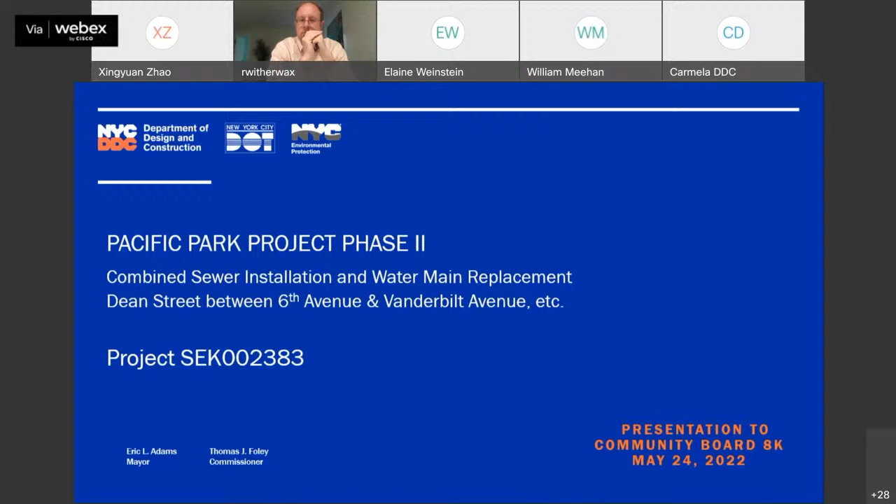So this is a presentation on the Pacific Park Project Phase 2, Project SEK002383, on Dean Street between 6th Avenue and Vanderbilt Avenue and some other avenues which we'll get to. It's the combined sewer installation and water main replacement project. So this is just the agenda.

We have not yet issued a notice to proceed to a contractor because we haven't engaged a contractor just yet; we're still moving into that process. The project is to start this fall 2022, and once we have more details we will share those with the community. It's expected to take 36 months, and once we have the contractor name we will share that. The total cost of the project is $15 million.

DEP prioritized this project to provide residents living in the newly constructed buildings with sufficient capacity for sanitary discharge and to convey stormwater from the project area. It's also to upgrade the water main sizes to provide for additional peak demands and to improve fire safety protection.

So the combined sewer replacement is on Dean Street between 6th and Vanderbilt Avenues, and Vanderbilt Avenue between Dean and Pacific Streets. The distribution water main is between Carlton and Vanderbilt Avenues, Vanderbilt between Dean and Atlantic Avenues, and Carlton between Dean and Pacific Streets.

So there are two water mains on Vanderbilt Avenue between Dean and Pacific Street. One is in the street and one is in the eastern sidewalk, which means there will be some digging up of the sidewalk. However, the lamppost will be protected since it's within a historic district. The sidewalk replacement will be cement according to landmark preservation requirements, and the curb will also be granite.

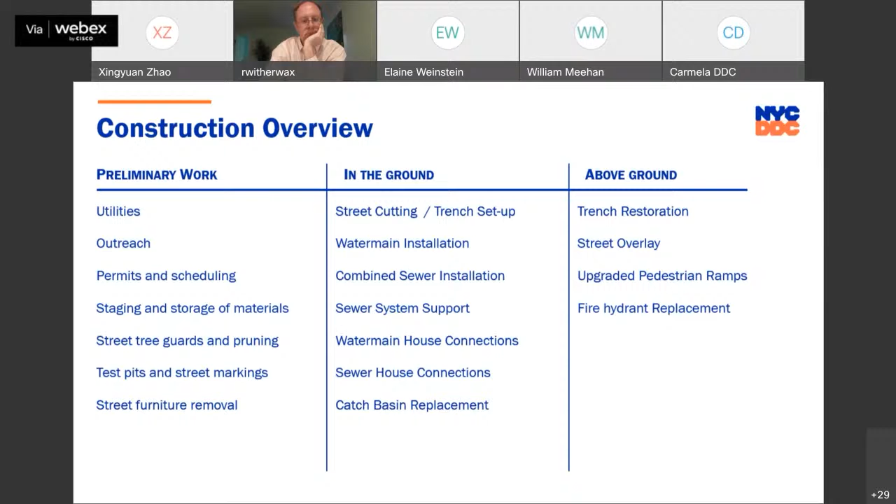And this is typically what the street looks like underground. As you can see, the utilities have to be moved and the water main has to be excavated, and that's all sort of the spaghetti underground.

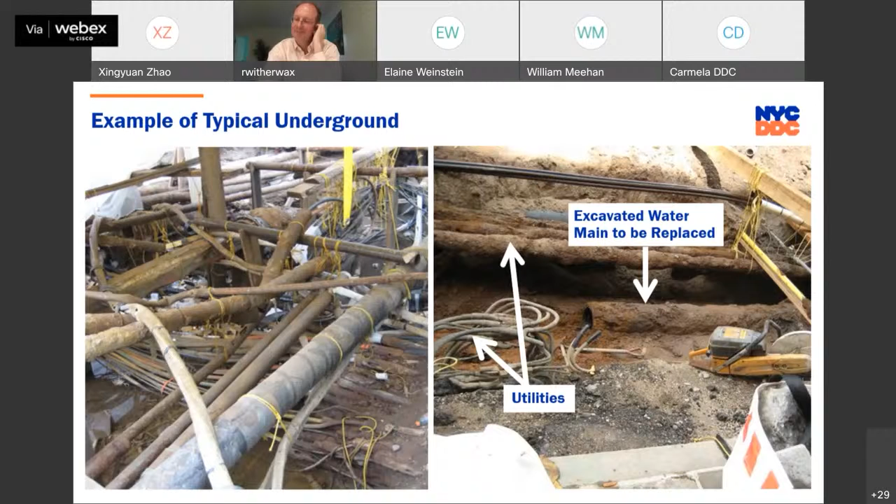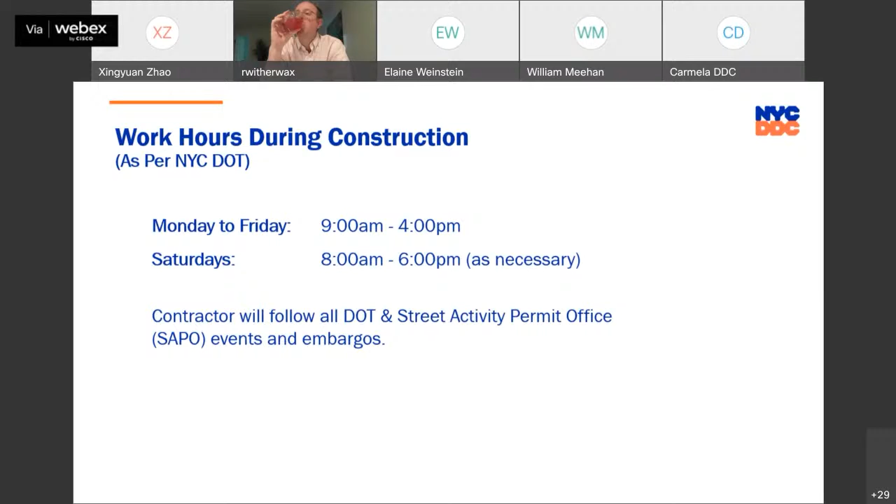So during construction, as per New York City DOT, construction will take place Monday to Friday from 9 a.m. to 4 p.m., and Saturdays, if necessary, from 8 a.m. to 6 p.m. The contractor will follow all DOT and SAPO events and embargoes.

Traffic patterns during construction: the contractor will be responsible for personnel, signage, and maintaining a safe work site for pedestrians and vehicles. Pedestrians will have access to buildings and sidewalks, and bikers will be notified ahead of work in that area. Also, there has to be a minimum width of 5 feet access on sidewalks and crosswalks.

The contractor will ensure that travel lanes are maintained. There may be intermittent reduction of travel lanes when necessary, and if necessary, there may be a full roadway closure, but notice will be given upfront. There will be signs, and hopefully it will be timed appropriately when necessary.

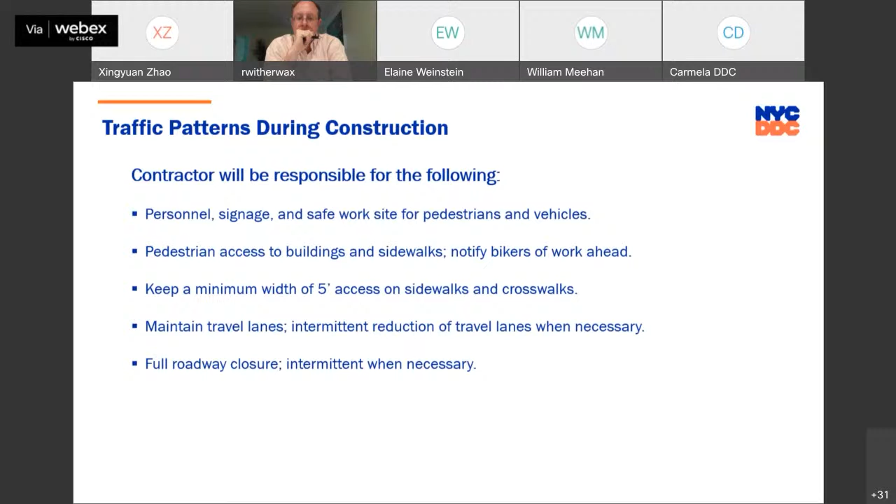So the community impacts and mitigations: the contractor will obtain pre-construction reports, which will be done by a separate entity. They will work within DEP noise code regulations. They will ensure the area has enough water during temporary water shutdowns, so they will coordinate with critical businesses in the area.

They will post an advance contractor's 24-hour notice to impacted areas. They will keep the storage site and area clean and safe, and they will cover trucks delivering fill material. Also, they will provide a professional rodent control inspector to monitor and maintain a rodent control station.

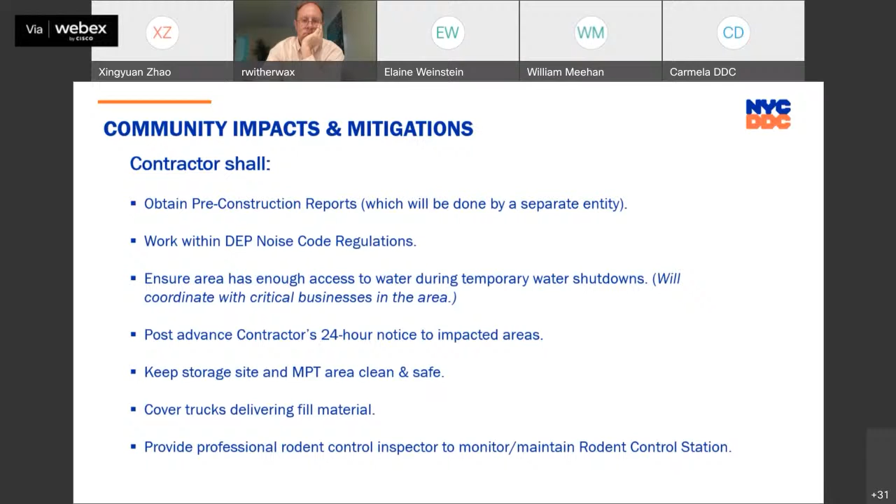Driveway access may be temporarily restricted during work hours, but coordination is done on a case-by-case basis. Parking may be temporarily restricted when necessary, and signs will be posted. Garbage pickups may be affected, but will also be coordinated by the field office. Individuals with special needs would need to contact the CCL, which we'll talk about later, and the field staff will work to minimize any inconvenience.

OCON is DDC's Office of Community Outreach and Notification, and OCON works with the CBs, the BIDs, the local businesses, and other community stakeholders impacted by construction. The CCL is the Community Construction Liaison, and that person will be the dedicated on-site point person.

Once we have that CCL on board, that CCL will reach out to the community board, as I did, and get the names and email addresses of all interested stakeholders to keep them notified by email. The CCL will also go door to door. That will be the person that everyone should contact if any issues come up during construction.

So again, they will be the first point of contact. They will maintain an on-site presence. They will resolve any issues that come up. They will distribute the advisories and weekly newsletters, and they will provide the 72-hour and 24-hour confirmation or cancellation notices, by email or door to door, and they will attend the community board district cabinet meetings.

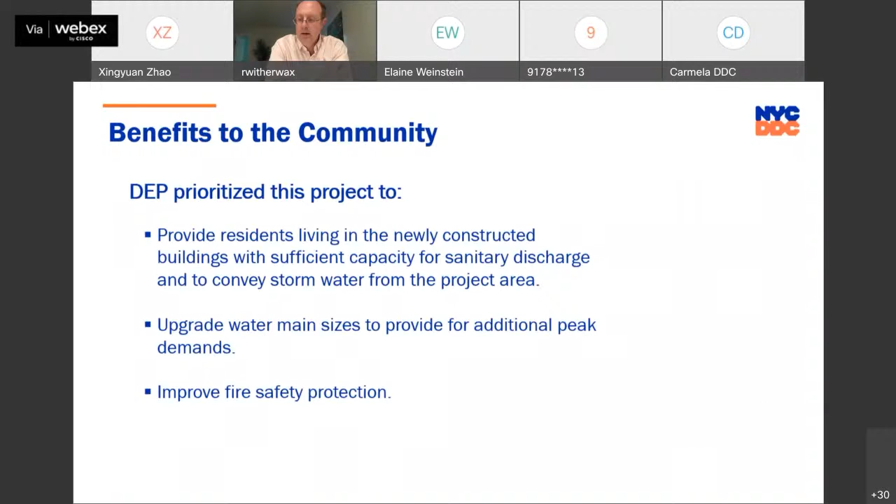Carmela, thank you, Design and Construction, for sticking around. We've got a few questions percolating in the chat, and for those of us who aren't on this visually, I'll read them aloud. What will drive the need for Saturday work?

Okay, let me see who's on. Marie, do you want to answer that question? Are you still on? I can't see, hold on. I don't think she's here, but generally what would drive the need would be anything that's found, emergency work maybe in the ground. Construction can answer that a little bit better than I can, but again, it's as needed. So if they find something that they have to work on and it needs to go into a Saturday, they would do that. But the hope is that the construction would be just Monday through Friday. And of course, the CCL would also be able to provide information on that once we have a CCL.

Right, and my experience with CCLs has been they excel at providing information, perhaps inundate you with information. So hopefully we'll get one of those.

How long do you anticipate water shutoffs will last? I'm sorry, we have interference. Water shutoffs, about how long would they last? A typical water shutoff lasts maybe between 8 a.m. and 3 p.m. The community is always advised in advance if there's going to be a water shutoff, and they're also advised when the water is back on, because there's a certain way for homes to get that water running again. So it would normally last somewhere between 8 and 3, generally speaking, unless it's an emergency. I don't want to be too definitive about anything because things happen, but I think everything's different.

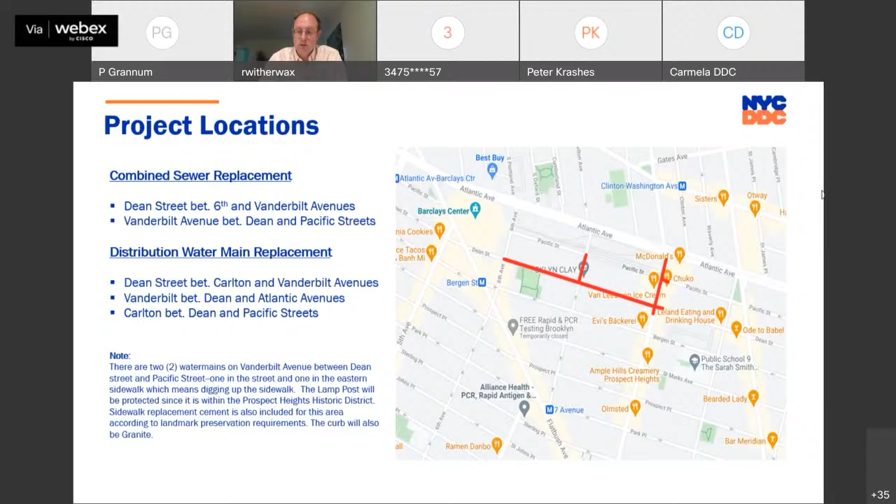That's great. No, it's absolutely, to your point, Mr. Krashes, a feedback loop. You tell us where you are, and we tell you where we'd like you to go, and vice versa. By the time we get those things, you've heard some of our feedback. And to Marie's point in the chat, there's also going to be a monthly task force meeting to update the community on the status of the project and address any ongoing concerns. The sooner we can get that up and running as a structure and expectation, I think the better for the community.

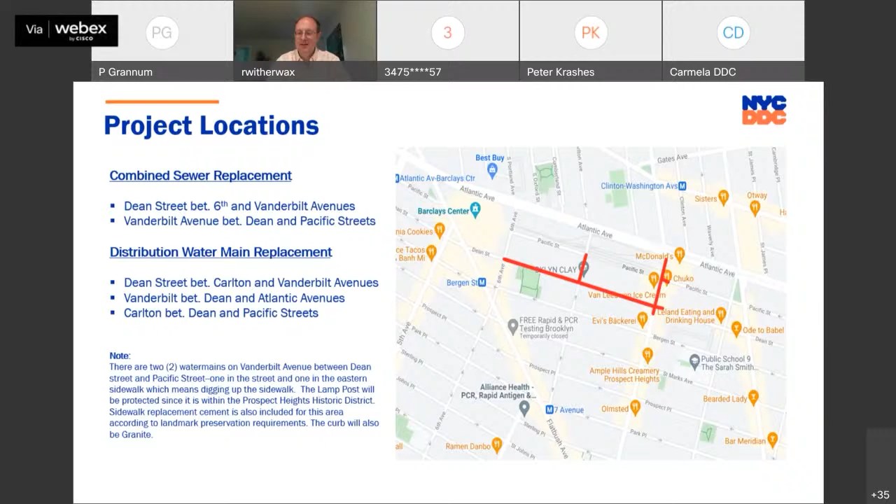Sure, I'll reach out. Maria's the borough director for Brooklyn Construction, so she's fully in charge of what's going to happen with the contractors, everything, and the field office. She's the head of it all in Brooklyn, so we're happy she's here. And I'm so happy that design is here as well. Thank you, design. Are there any additional questions?

No, I think that's the sum of it at this point. Any other final questions?

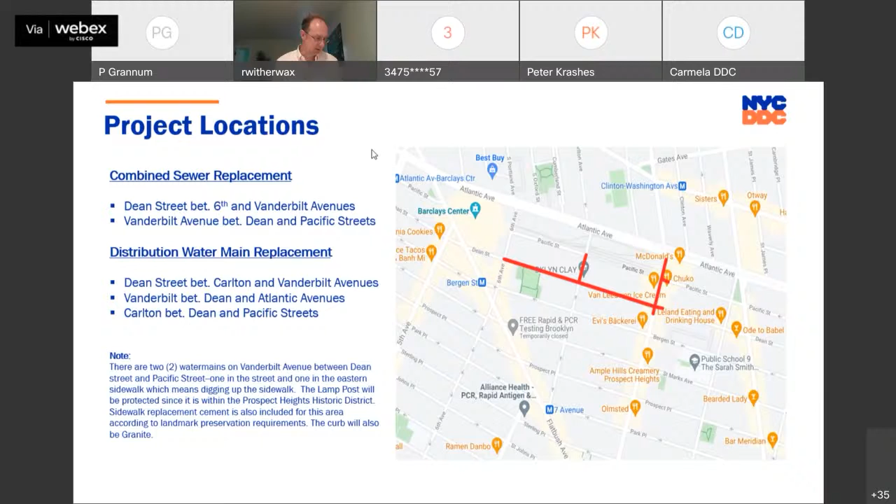Great, thank you very much for your time. As you said, this may have been the first on this project, it won't be the last. Right, we look forward to inviting you back. Thank you so much, everyone, for attending those monthly meetings in some capacity. I look forward to it. All right, have a good evening, everyone. Thank you, Carmela. Bye.

Thank you to everyone who asked good questions.

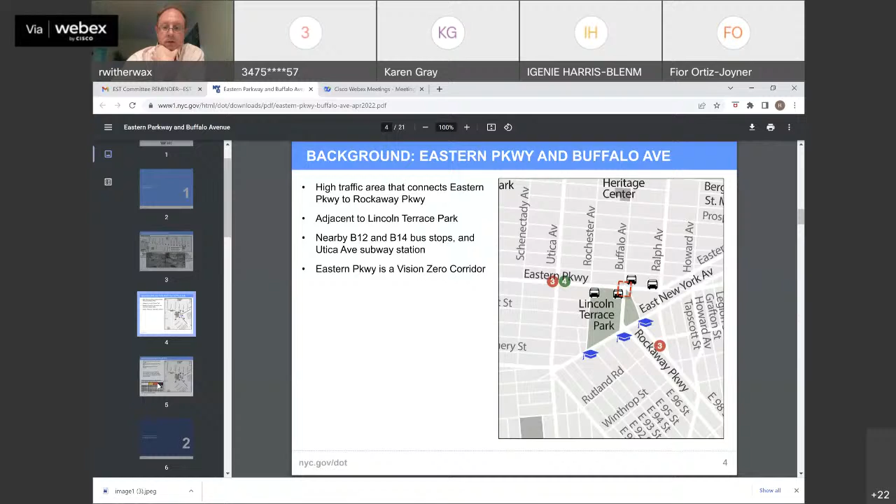Existing conditions. I'm going to go to the proposed conditions. So there were several elements to it. Move northbound through movement to the rightmost lane. So if you're going north on Buffalo through Eastern Parkway or hanging a right onto Eastern Parkway, the right lane only, which makes the next two lanes left turn only. And the signal phase will be, when those two lanes are green, pedestrians will not be permitted to cross Eastern Parkway. So separating that out, which is excellent.

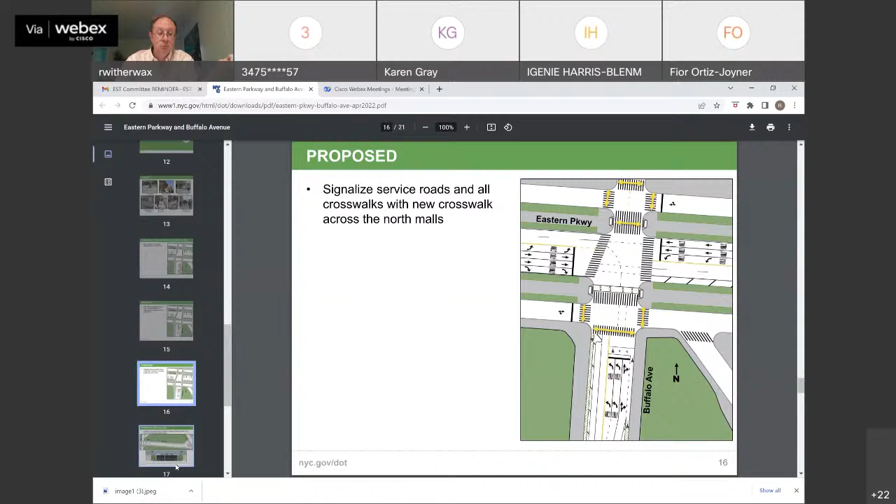The service roads, all of those yellow bars will get crosswalk signals and crosswalks that don't exist. This is now turned sideways, so that's Buffalo Avenue between the two parts of Lincoln Terrace Park.

Upgrade the conventional bike lane from Eastern Parkway to East New York to a parking protected bike lane. So we can swap. If you look at the bottom of the picture, you've got people walking, you've got the tree, then the cyclist, then the zebra stripes, and then the parked car. That's a swap from where it is now.

And then here at the bottom, where the cars slip off to go westbound on East New York Avenue, it's more of a turn as opposed to just a straightaway, and it lessens the interaction between cyclists going southeast on Buffalo Avenue and cars going southwest on Buffalo Avenue.

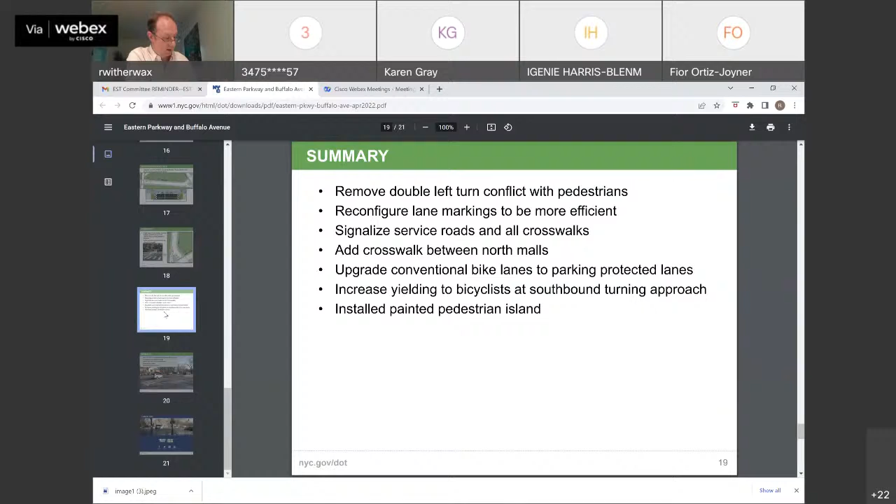So again, we had some great feedback on this: speed bumps, priorities about what you're going to work on. The big takeaway was a crosswalk somewhere, I'll go back to this one, somewhere the natural crosswalk might be mid-block to get from one half of Lincoln Terrace Park to the other half. That would be a great idea.

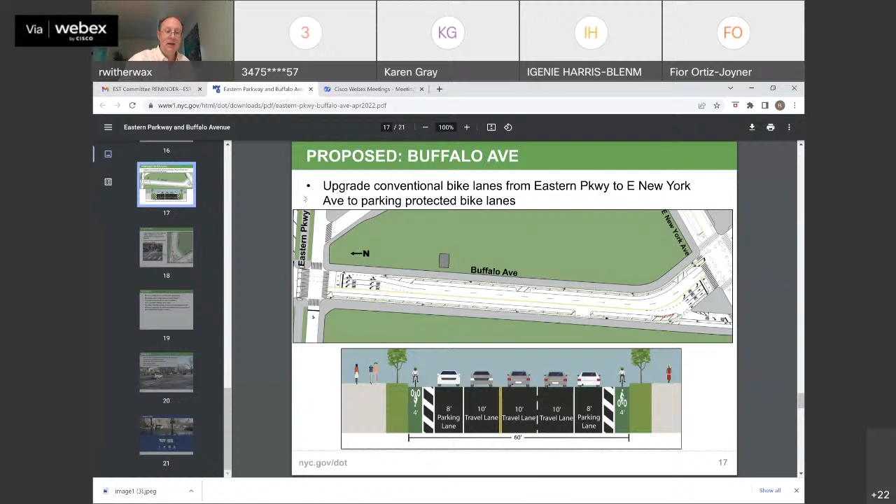People are saying add stop or yield signs at the crosswalk between the park and the tennis courts — do it right the first time. Somebody suggested placement of overhead signage indicating the flow responsibilities of each lane. So going back to this first slide, if you're going straight, you need to get to the right; if you're going left, you need to be in the left two lanes.

Again, a signalized mid-block pedestrian crossing to join the two halves of the park. And then somebody also suggested, well, if you're going to do that, why not raise the crosswalks? That's something in DOT's toolkit, done in many cities around the world. It not only puts the pedestrian 6 inches higher and more visible, but it's a de facto speed bump too. Great ideas. We don't have them in New York for whatever reason. I've heard an urban legend there's one somewhere, but I've not found it.

Does anyone have anything they want to add by way of comment to the Buffalo Avenue feedback? So again: speed bumps, priority of rollout, mid-block crosswalk, protecting the slip lane a little more aggressively, and overhead signage and raised crosswalks.

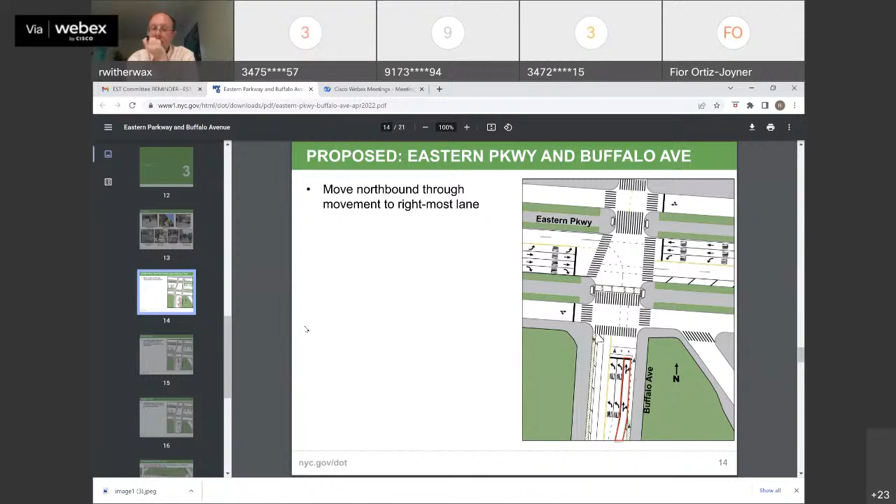So, how about a sign at the foot where Buffalo Avenue starts at East New York, so people slow down coming up the hill to go to Eastern Parkway? Have a flashing sign from the pole in the middle of the street, just to slow down, because that's where a lot of accidents are occurring. They cannot negotiate the corner when they come from Rockaway Parkway going into Buffalo.

Sure, we can add that to the list. I think that would help, because you have daily accidents out there as a result of that. People are speeding. That's an easy ask — the city can roll out those VMS signs in a day. Yep, it shouldn't take long.

Any other additions to the Buffalo Avenue feedback? Mr. Witherwax, this is Ethel Tyus. I would strongly recommend additional pavement signage directing the cars that are going to make that turn to go east on Eastern Parkway as they go up Buffalo Avenue. Not only overhead signage, but on the ground too. Correct. Thank you.

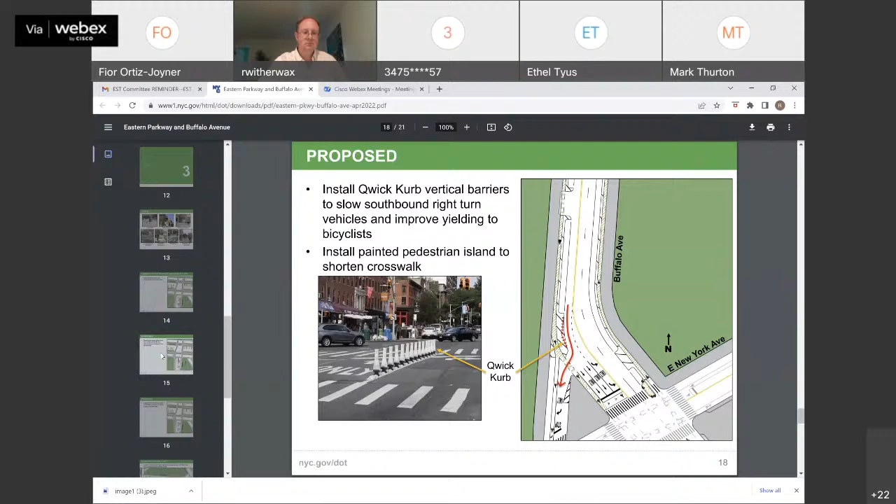Ms. Joyner: Thank you. This may have been discussed at the last meeting, but if so, forgive me — could you refresh my memory? If a person is crossing on Eastern Parkway from one service road to another, especially a senior citizen, will the time be a bit longer? Because that's a very large street to cross from one service road to another.

I don't recollect that we talked about specific signal phase timing. But I don't know if it was enough time to get, at a senior's pace, from north of the north service road to south of the south service road. Well, I don't know — that's a great question for follow-up.

If you stand on any given intersection with your smartphone and time it from the point the light turns green, it goes for the whole signal phase till it turns green again — that's your universe. Then you slice it up: how much time is green, how long is it yellow, how long is it red. It's a really exact science that DOT gets into. So their signal phasing always has downstream implications.

If you give more time to one crossing, you've got to take it from somewhere else. It's fascinating - I guess DOT can say they can stop at the island. It may just take a little longer for the slower demographic to cross Eastern Parkway. But I'll ask what the signal phasing is for the north-south pedestrian crossing. It's something we should know.

All right, so we can move this on to DOT. I think they'd appreciate the criticism sooner rather than later. And as long as no one in the committee objects, the chair will make an executive decision to pass it on.

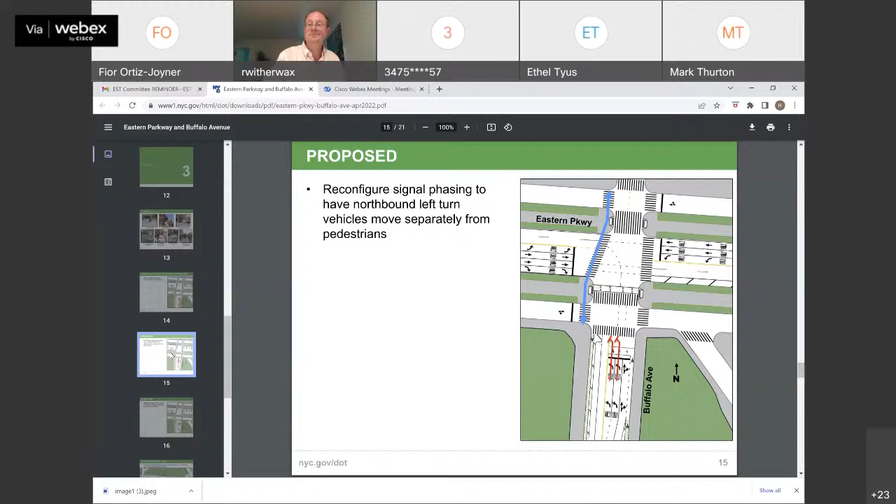Moving on, let me stop the share for a second and go to the other proposal that we heard. Mr. Witherwax - who's that? This is Mark.

On that presentation, could you just send that out to the committee? I'm not sure if I saw it, I might have missed it. Sure, I definitely sent it out this afternoon. I'm not sure if it was just to you in response to your request or to the whole committee. It was a reply all - we all got it in the email. Okay, good.

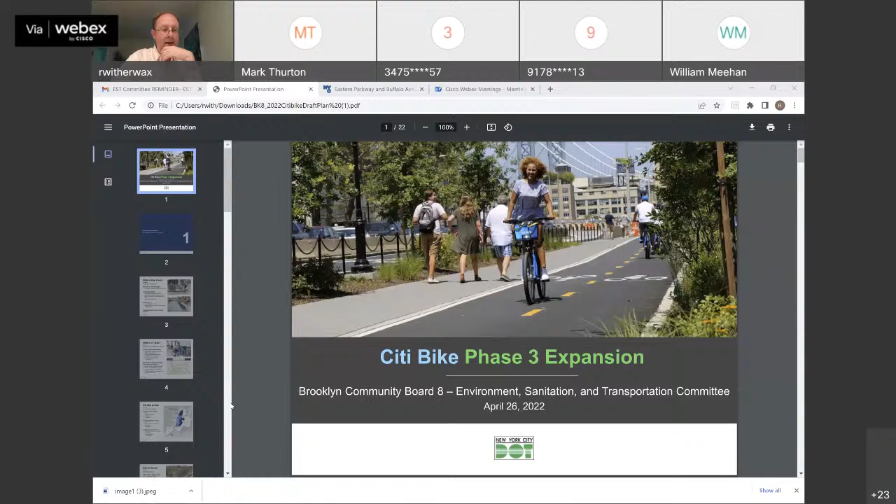All right, so I'm now going to share the Citi Bike expansion slideshow. Same idea - we had a lot of good feedback and criticism of the proposed locations. First and foremost, what are the CB9 locations, specifically those on or adjacent to Eastern Parkway and Lincoln Terrace Park? We can't make an informed decision on the quality of the location sitings in our district unless we know where they're going to be just across the street in CB9. So it's regrettable that didn't happen.

There were some concerns raised at the Public Safety Committee meeting about whether we have an opportunity to review suitable stations for city bikes in Crown Heights. We need more city bike stations directly in front of subway stations. The map shows several stations without any city bike docks, which relates back to the observation that there's no proposed docks near the Nostrand Avenue station and no proposed docks that we can see near the Utica Avenue station, which seems a little silly.

But maybe they're there on the south side and we just don't know. Very happy to see most of these in the roadbed - our sidewalks are pretty busy and narrow, so I'm glad you won't be encroaching on that. Counterpoint: not happy that they're in the roadbed because there's no parking for neighborhood residents. We already have a problem looking for parking when we come home from work. So the eternal argument - siting is very much an art and a science. That's to be discussed.

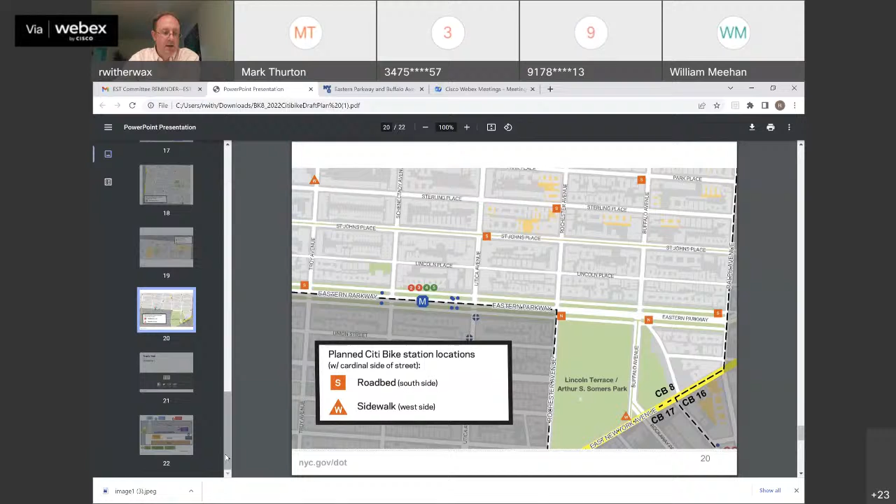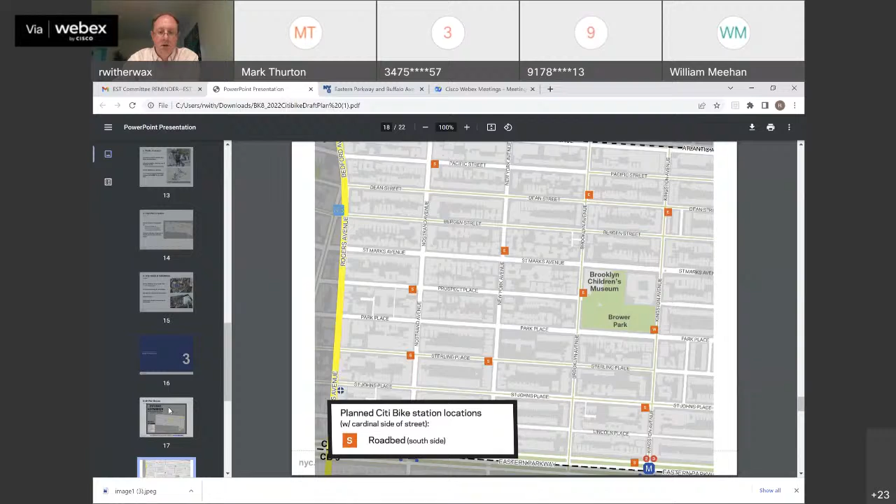So how do we want to take this? Again, keeping in mind we're not going to vote on anything tonight. We've seen the list here of where stations are proposed. As I toggle through the slideshow, I didn't actually count them up - I think it's about 27 or so maybe in the whole district.

I use Citi Bike almost every day, and I find it a fantastic way to get those short distances that are just a little far to walk and not far enough to drive. If I'm running into Brooklyn Heights or if I'm in Manhattan and I need to go from my downtown office to somewhere in Chelsea, I'll city bike it. It takes me exactly the same length of time that the subway would.

And with these new Citi Bike pedal-assist, battery powered ones, boy, I don't even break a sweat, and I am not in shape, let me tell you. Anyway, I think they are a good, valuable asset to the community, but location is key. Density is key. They have to be spread out for them to be useful.

But I've said enough. Does anyone else want to add anything to the list? I do, it's Ethel Tyus.

Ms. Tyus: I really think they should be on a wide sidewalk and not within these neighborhoods of 2 and 3 family homes. They should rather be close to subway stops, as Ms. Wedderburn had mentioned at one of our prior meetings. And we don't need one every block, okay? In Crown Heights North, we don't need a city bike station on every block. Thank you.

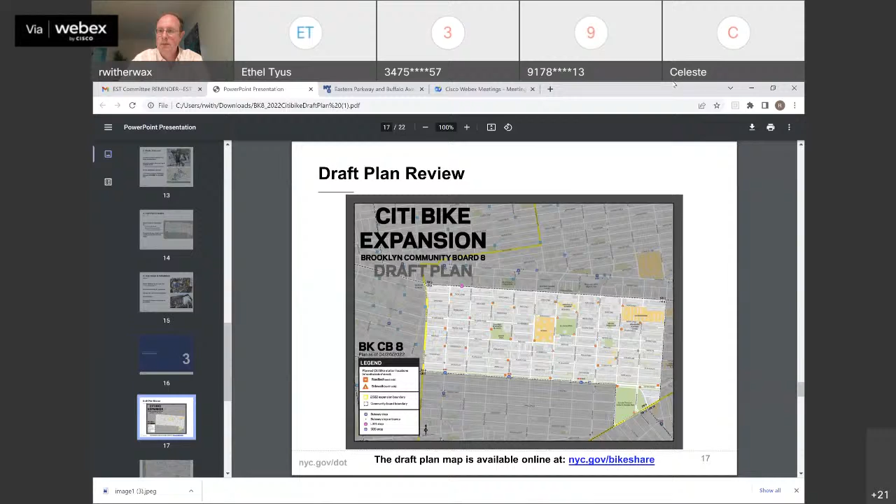I saw something go by, hold on, I've got to stop sharing to read the chat. Is there a way for, I'm sorry, Mr. Witherwax, before we move on, has that presentation been shared with the committee? Yes, this too went out in the same email as the Buffalo Avenue one, but this one is a link. That one was a PDF, one of them is a link, one of them's a PDF, but they're both in the same email.

Is there a way for the public to directly input comments and suggestions to DOT about locations at this point? Yes, and again, let me go back to that presentation. No, they've taken out the slide that had their contact information, because this is the public-facing version of the presentation. If you want to email your comments directly to the board office, I'm sure they can send them on to the City Bike people. But there was a portal, which is now closed, for suggesting locations as opposed to responding to selected locations. We can try to find that more efficient way to do that.

Before we go, Mr. Witherwax, I just want to let you know I would love to start my video, but I've tried rebooting and everything. It will not take either camera that I have available on this device. So my suspicion is that since there's so many other people who are not using their video, they're having a similar problem. I only wish my video didn't work and you wouldn't all have to look at me. So I'm sorry for that. Okay, the short straw.